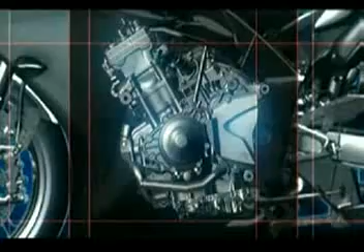The inline 4-cylinder engine offers a new dimension in linear throttle action. This is achieved through the cross-plane crankshaft and the 90 degree phase positioning of its 4 crank pins.

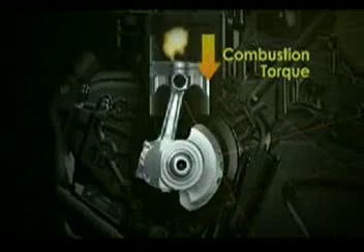The rider operates the throttle, producing torque. This torque is essentially produced solely from engine combustion. However, total engine output, or composite torque, is actually a combination of this combustion torque plus the inertial torque produced by the rotation of the crankshaft.

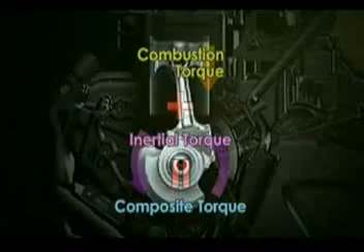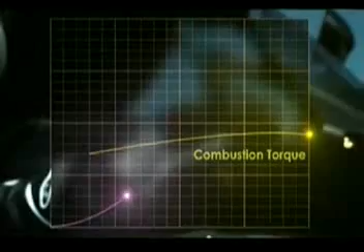Inertial torque is unlike combustion torque. Inertial torque results from the rotation of the crankshaft. Combustion torque can be operated by the rider through the throttle, but inertial torque grows larger in proportion to the speed of the crankshaft rotation, and thus prevents linear throttle action from being achieved.

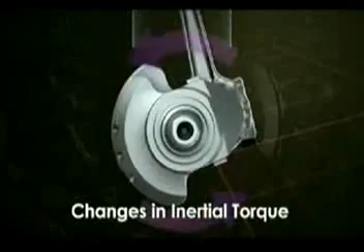As you can see, this is due to the crank moving the slowest at top and bottom dead center and the fastest at 90 degrees and 270 degrees.

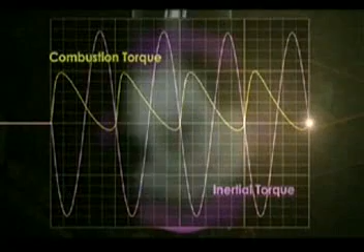The result is this graph. The rider wants combustion torque, but because of the addition of inertial torque, which cannot be controlled, the result is something disordered, a composite torque unlike combustion torque.

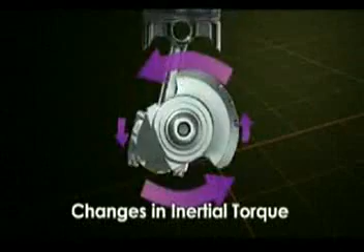The solution to this is found in the cross-plane crankshaft. By differing the adjacent crank's rotations by 90 degrees, inertial torque fluctuation is eliminated.

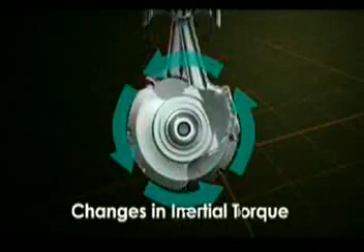As you can see, inertial torque is almost completely eliminated, and the combustion torque sought by the rider is almost perfectly matched by the composite torque of the engine. In other words, the rider is able to achieve linear power delivery and traction through the operation of the throttle.

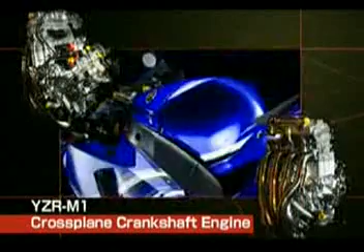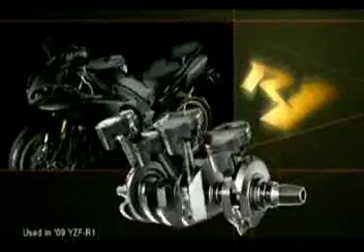With the exception of a few racing machines, no commercially available motorcycle has offered an inline 4-cylinder engine with a cross-plane crankshaft. This new dimension in linear throttle action brought about through Yamaha technology is going to shift the entire paradigm of the supersports motorcycle world.